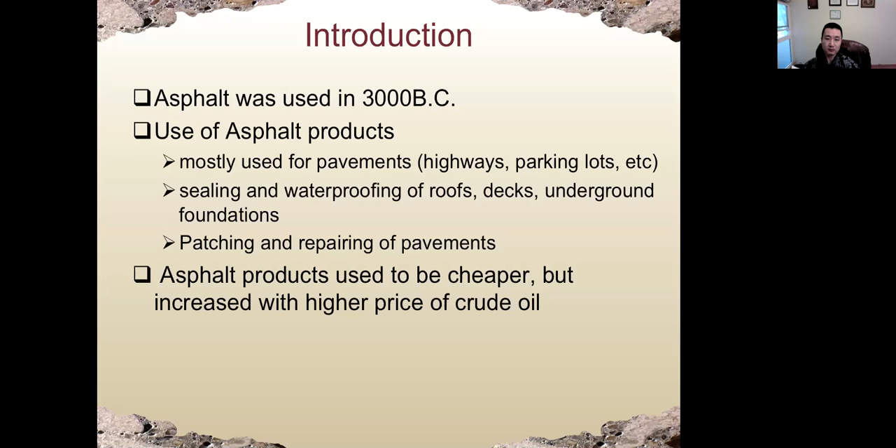Crude oil, everybody knows, is a form of fossil fuel. The other types of fossil fuel are coal and natural gas. Crude oil is a mixture of many different types of fossil fuel, including gasoline, which we put in cars, diesel oil, fuel oils, kerosene, jet fuels, and also asphalt. Crude oil, depending on the source and location, may change in color and thickness and in the percentage of different types of oil inside.

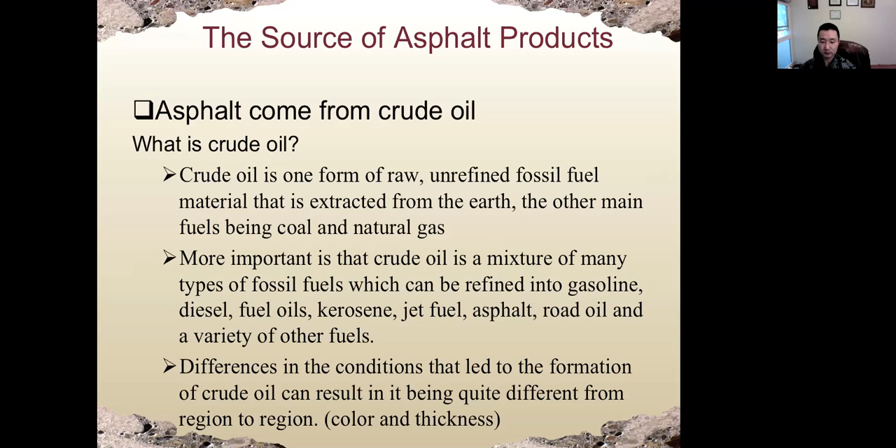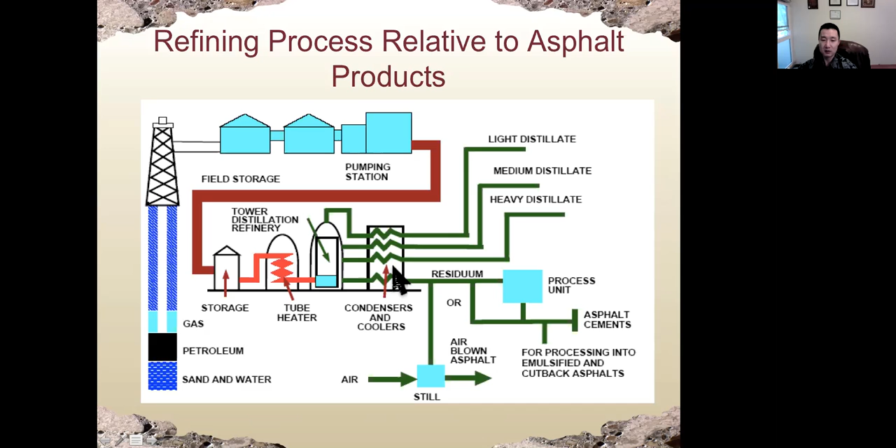Inside residue we have asphalt cement, or we have emulsifying agent, and also distillate, which we also use in some types of asphalt cement. We're gonna discuss that in a moment. So the refining process includes separating different types of materials based on different temperatures.

Again, the first step is we remove the sand and water from the crude oil, put in the settling tank. And most crude oil is somewhat acidic, so the pH level is less than 7.

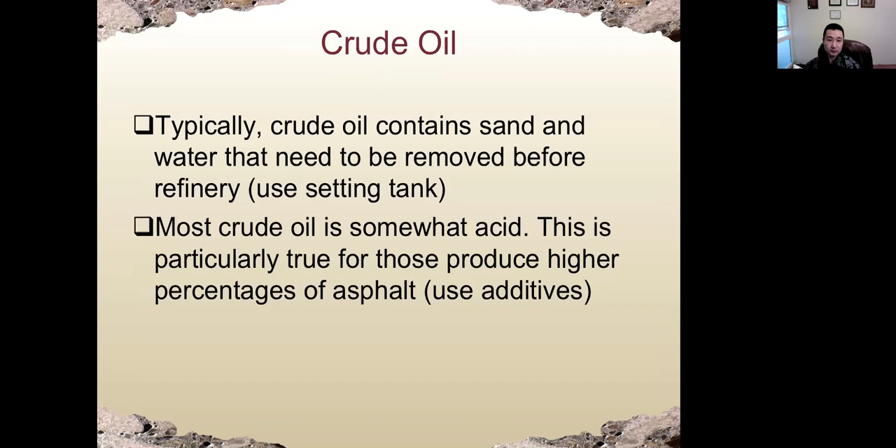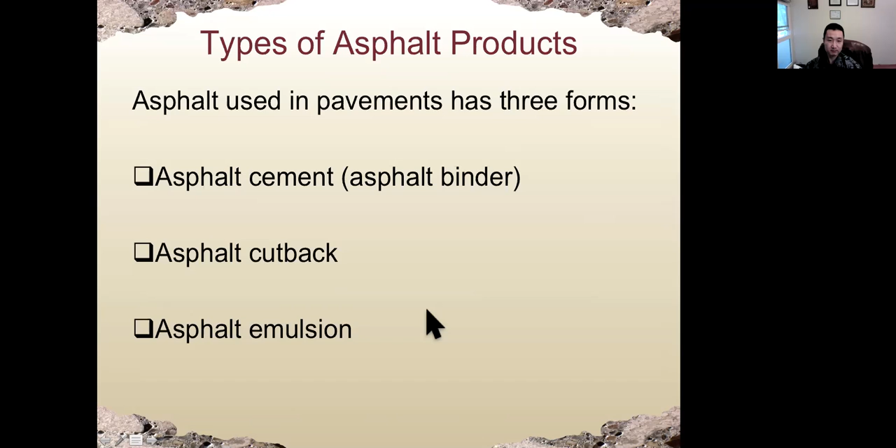Then let's look at asphalt products. Asphalt used in pavement has basically 3 different forms, depending on how we liquefy them. So they are asphalt cement, also called asphalt binder, asphalt cutback, and asphalt emulsion. We have these three types of asphalt because the ways we liquefy them are different.

But first of all, why do we need to liquefy asphalt? At room temperature, the asphalt is semi-solid. But for asphalt concrete, we need to mix the asphalt with sand and coarse aggregate. This is the same as Portland cement concrete. For Portland cement concrete, we mix cement powder with water, so we have cement paste. Then we mix the cement paste with sand and coarse aggregate, so we have Portland cement concrete.

For asphalt concrete, the asphalt will be the binder, same role as Portland cement paste. But at room temperature, asphalt is semi-solid. How can we mix it with sand and coarse aggregate? So we need to liquefy it. How do we liquefy asphalt? We have three different methods, so we have three different asphalt products.

For asphalt cement, the liquefying method is heating - we increase the temperature of asphalt cement to liquefy it. Or we can dissolve it into a so-called petroleum solvent, in which case we call that asphalt cutback. Or we can emulsify it with water, in which case we call that asphalt emulsion. And asphalt cement is by far the most commonly used asphalt product.

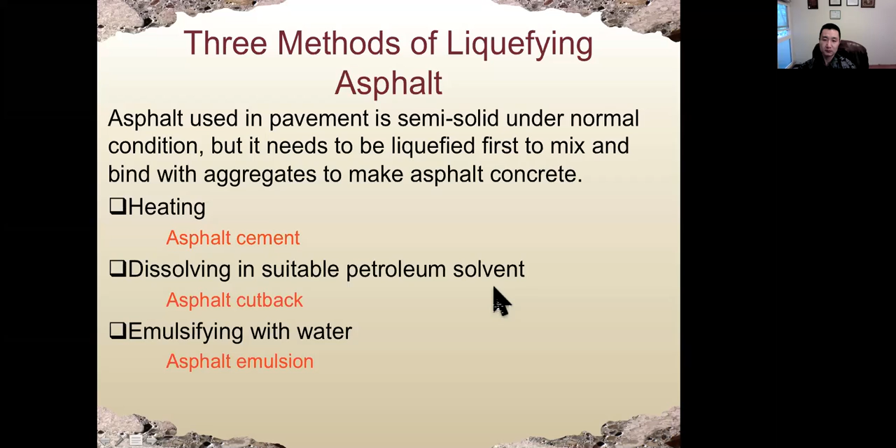Let's look at asphalt cement first. It is the first type and the most commonly used one. It is a residual from crude oil distillation. The consistency, which is how easily the asphalt cement can flow, depends on the source of the crude oil, the refining process, and also the amount of lighter fraction removed. It is semi-solid under room temperature.

To make it liquefy, it needs to be heated up. So when we heat up the asphalt cement, the viscosity will be lower, so we can mix it with sand and coarse aggregate. So that's the first type, asphalt cement.

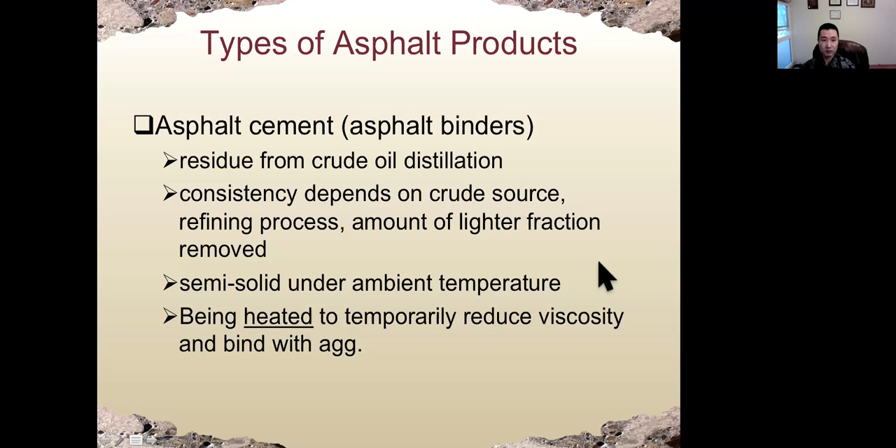The second one is asphalt cutback. It is produced by dissolving asphalt cement in a lighter molecular weight hydrocarbon solvent. The hydrocarbon solvent also comes from crude oil, so the properties depend on the types and amount of the solvent. The curing rate, which is how soon the asphalt cement hardens, depends on the type of solvent we use, and the viscosity is a function of how much solvent we add - we need the solvent to liquefy the asphalt cement.

The solvent will eventually evaporate into the air, so the asphalt cement will harden. Because the asphalt cement comes from crude oil, it used to be cheaper, but the price depends on the price of crude oil. Another drawback of asphalt cutback is that it is not very environmentally friendly, because the solvent will evaporate into the air, which may pollute the air and cause pollution problems.

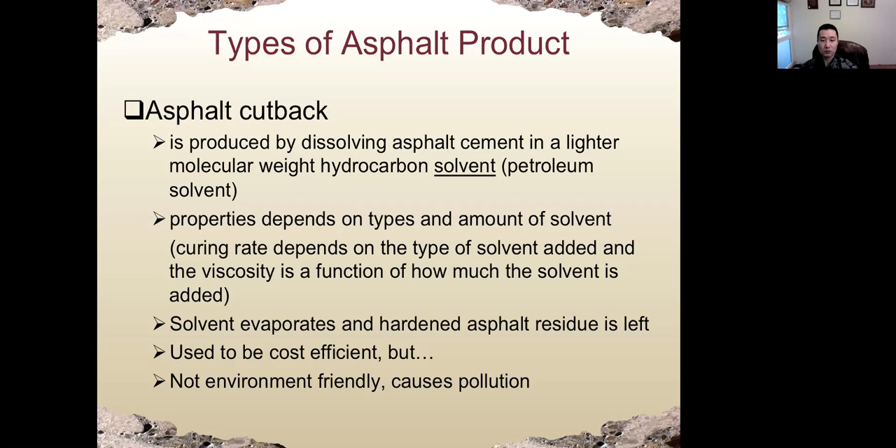The third type is asphalt emulsion. Asphalt cement for asphalt emulsion is physically broken down into smaller size globules, which are mixed with water. The water has a small percentage of so-called emulsifier agent - the percentage of emulsifier agent is very small, only about 1% of the total. So for asphalt emulsion, we have 60 to 70% asphalt residue, about 30 to 40% water, and 1% emulsifier agent.

Emulsifier agent is similar to chemical admixtures, such as superplasticizer we use in Portland cement concrete. Let's look at the molecule - the molecule of emulsifier agent has two different sides, two different components: a head with electronic charge, and also a tail which has high affinity for asphalt.

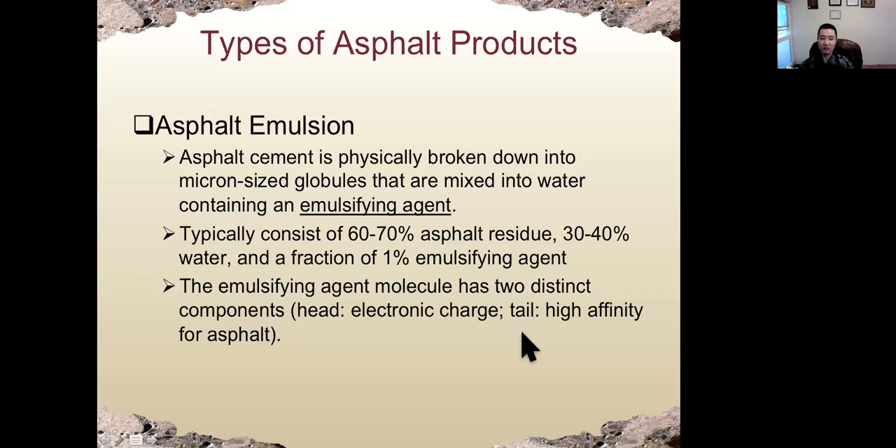This is similar to the molecule structure of superplasticizer, and the function of the molecule for emulsifier agent and superplasticizer is also kind of similar. As we can see, the head is hydrophilic, which means it likes water, and the tail is hydrophobic, which means it hates water. So the tail will attach to the particle of asphalt, so the surface of the asphalt particle will all be negative charge, so they will repel each other - that's how we can emulsify the asphalt emulsion. Again, very similar to how superplasticizer works.

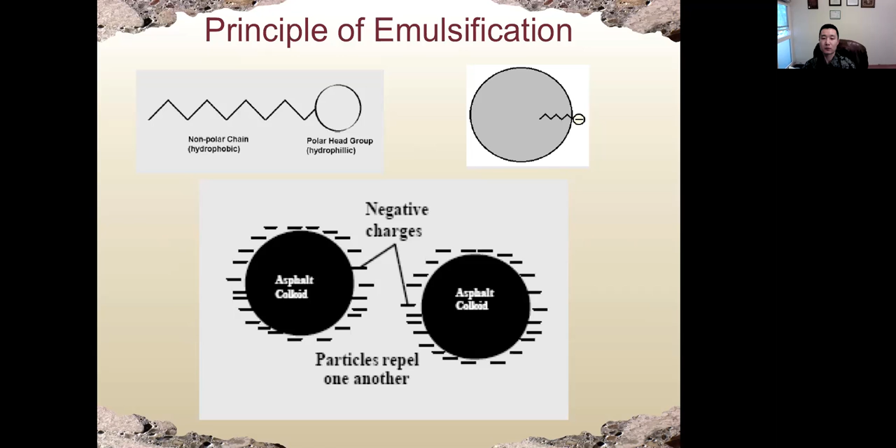So for asphalt emulsion, the setting, which is how soon the asphalt will harden, is a phenomenon of separation between the asphalt residue and the water. In the water we have a small percentage of emulsifier agent, and the rate of setting is controlled by the type and amount of this emulsifier agent.

It is more cost effective because mostly we have water and only a small percentage is emulsifier agent. It's also more environmental friendly because not a lot of solvent is used, as it is in the second type of asphalt.

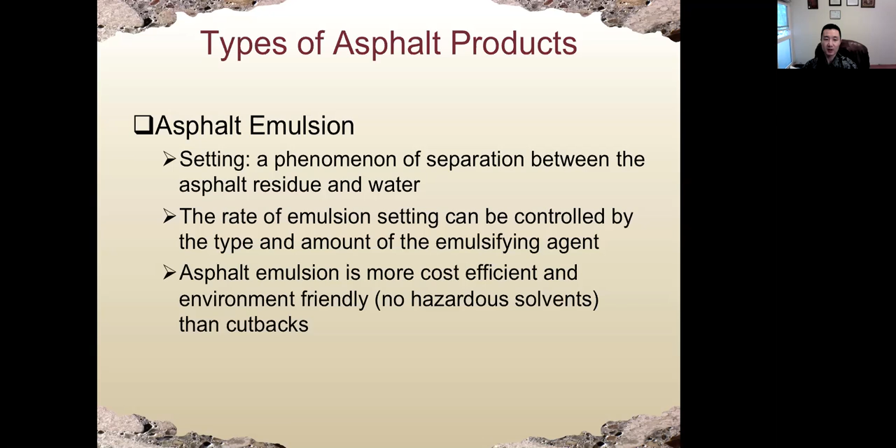Before we talk about the testing method for asphalt, let's talk about the special property of asphalt. Asphalt is a very temperature sensitive material. This is different from Portland cement concrete, which is not very sensitive to temperature.

Increasing or reducing temperature by 20 or 30 degrees will not change the hardening property of concrete quite a lot. But for asphalt, it is very sensitive to temperature. Increase the temperature 10 degrees, the viscosity will be reduced quite a lot, meaning it becomes softer. Reduce the temperature, the viscosity will be higher, it becomes hard and more brittle.

So for a certain type of asphalt, we have a so-called optimal range for viscosity. Because viscosity depends on temperature, for a certain type of asphalt we have the optimal range for temperature. At the end of this class, we'll try to select which type of asphalt for a certain location, because in certain locations the temperature range will be different.

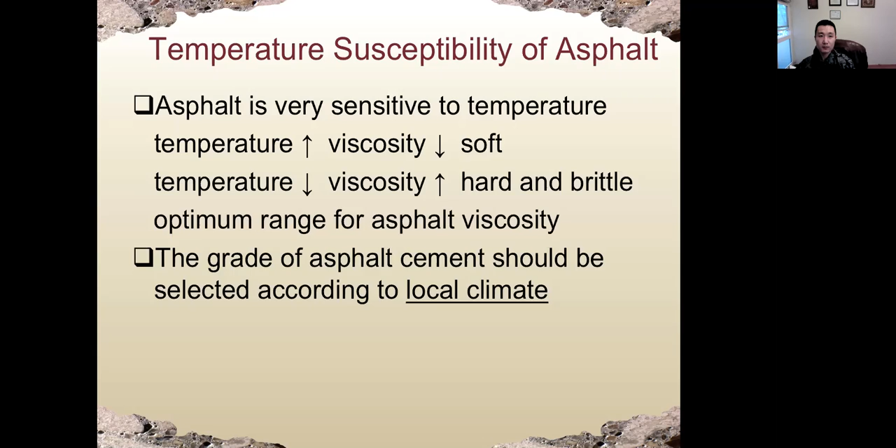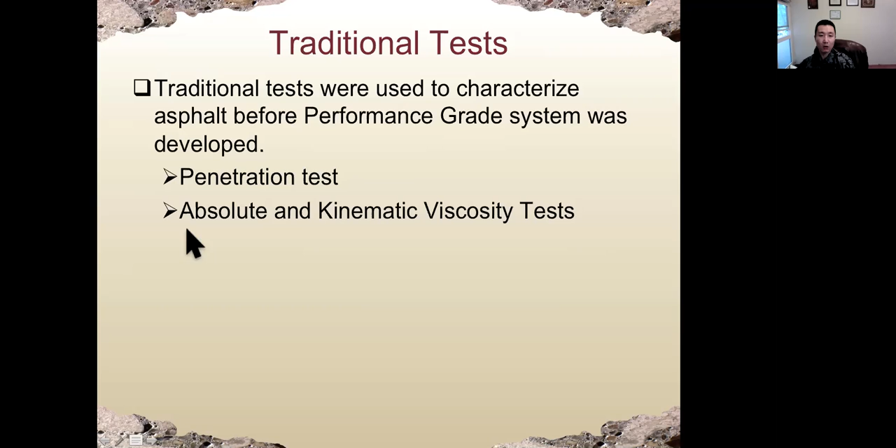Traditional test methods for asphalt include the penetration test, or we can measure the viscosity of asphalt cement. For example, this is the penetration test, where we measure the consistency of asphalt cement.

The test is controlled at 25 degrees Celsius, again because asphalt cement is very temperature sensitive. We use a needle with a certain weight, and the needle will penetrate the asphalt cement for 5 seconds. Depending on the penetration depth, we can judge the consistency of the asphalt. A larger penetration value indicates a softer material.

So this is a very simple test. We measure the consistency of asphalt cement, but this test does not give us an idea of the actual performance of asphalt, so we do not know how the asphalt will perform in a certain pavement.

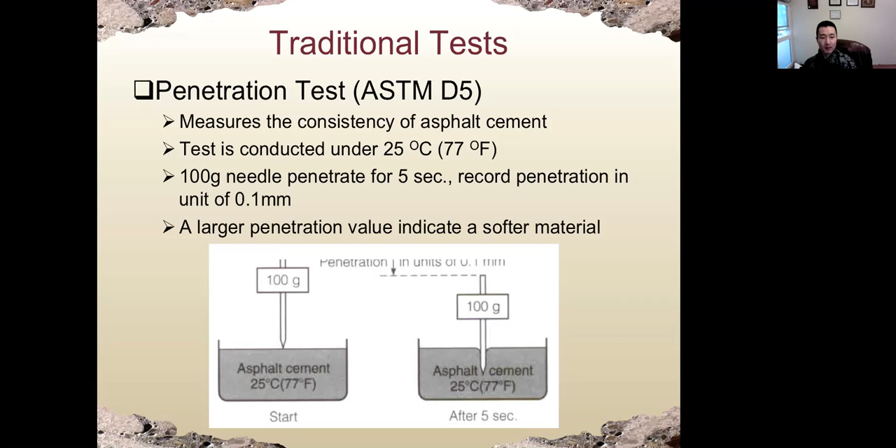That's the reason we later have a so-called performance grade test. The performance grade system was developed by the Federal Highway Administration. Inside the Federal Highway Administration, we have the Strategic Highway Research Program, or SHRP. It was developed around 30 years ago.

Compared to traditional tests such as the penetration test, the performance grade specification was designed to provide performance related properties of pavement.

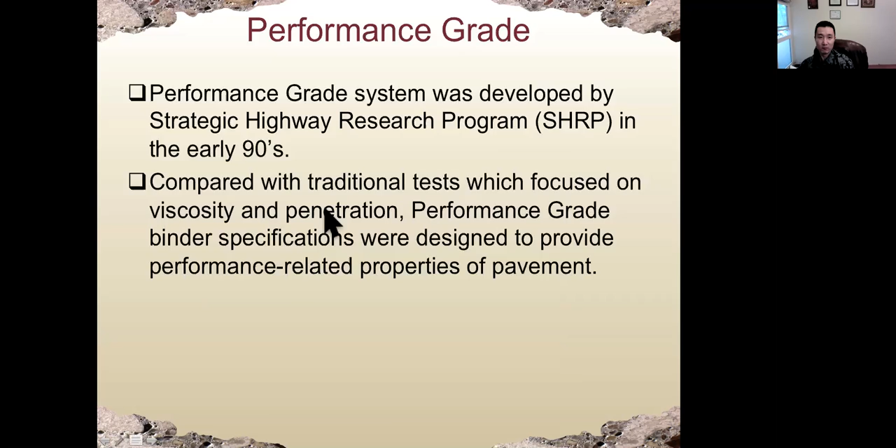For example, for this test, the name is called the rolling thin film oven test. This is one of the ASTM standard tests. This test simulates the short-term aging process of asphalt during the production period. In the production period, we heat up the asphalt and mix asphalt binder with sand and coarse aggregate, and then we pave the road. We do that on the first day of construction, and this rolling thin film oven test simulates that first day, the short-term aging process.

Why do we care about the first day? Because during the production period, we increase the temperature of the asphalt binder, and during that process we have a lot of heat due to the high temperature.

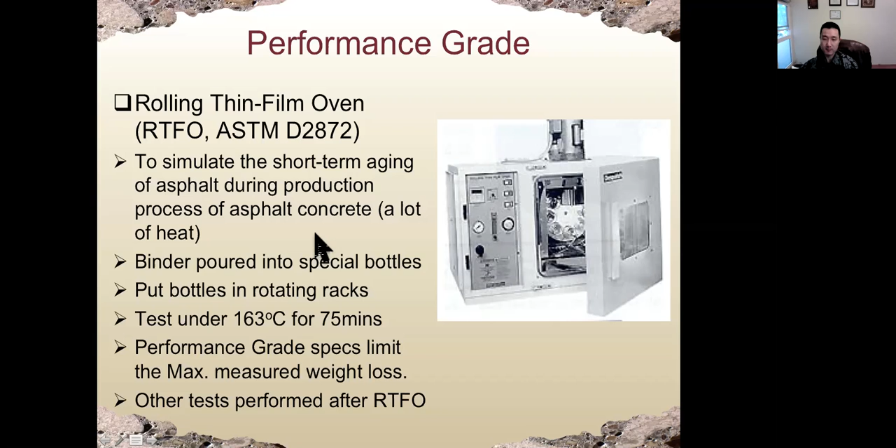The next test is called pressure aging vessel. It's also an ASTM standard test. The purpose is to simulate the aging process of asphalt over its service life, 10 years or 20 years. This is a slowing aging process.

The asphalt binder is first aged in the rolling thin film oven, the first test we just talked about. Then we force oxygen into the sample. The oxygen will age the asphalt binder over time, but it takes 10 or 20 years. How can we accelerate that process?

We use a vacuum oven to remove the air bubbles before the test, and then we age at a certain temperature, about 100 degrees Celsius, depending on the grade of asphalt. We also apply high pressure because we want to accelerate the aging process. So for 20 hours, we can simulate the aging process for 10 or 20 years of asphalt. After that, we can do some other tests such as shear, creep, and other mechanical property tests.

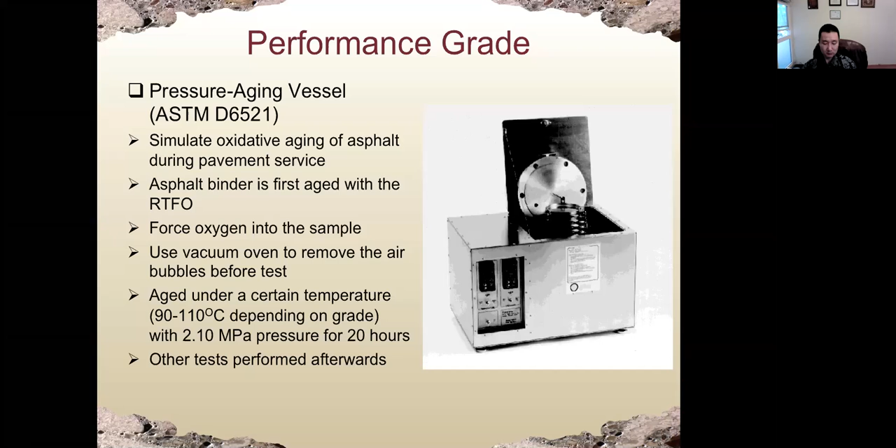This is another test called flash point. Because we do not want asphalt pavement to burn after a car accident, we want to know what is the flash point for asphalt.

For this test, it's pretty simple. We just increase the temperature of asphalt, and after several seconds, we pass a small flame on the top surface of the asphalt, and we see what is the flash point for the asphalt cement. So this is a safety test to measure the flash point of the asphalt cement.

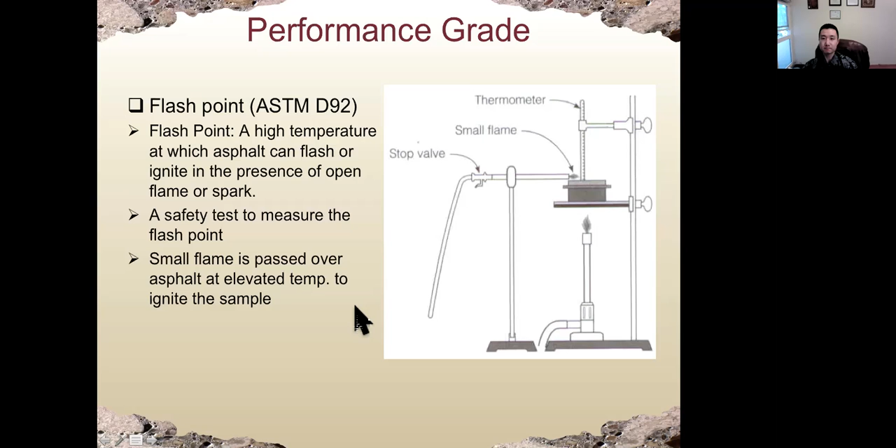This is viscosity measurement. We measure the viscosity of asphalt binder. This is called the rotational viscometer test. In this test, we have the coaxial cylinder setup. Coaxial cylinder means we have a rotational spindle which is inside a chamber. The chamber is also cylinder shaped.

In the sample, we have asphalt cement in there. So the asphalt binder is sheared between the cylinder, spindle, and the chamber. The temperature is well controlled at 135 degrees Celsius, and we can calculate the viscosity of asphalt based on the torque and also speed of the spindle. This is a very commonly used viscometer. We can use this for asphalt, and also we have used it for Portland cement paste.

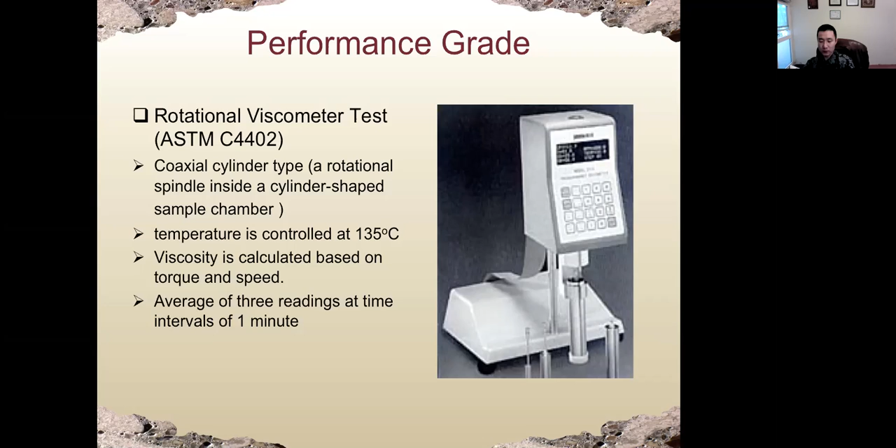For other performance grade tests, including shear, bending, or tension tests, this is for mechanical property of asphalt. All of them are ASTM or AASHTO standard tests. We'll just skip the details of these tests.

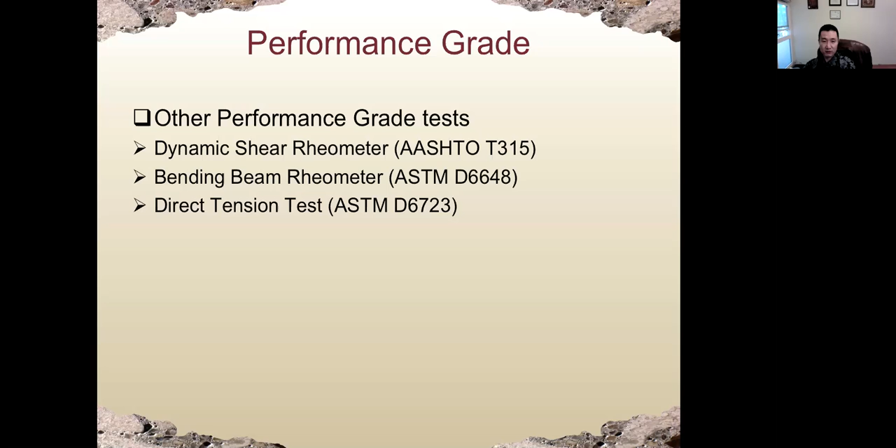So the last part of today's lecture, we talk about how we can select the asphalt based on local climate. Asphalt binder can be classified based on performance grading. This is a new type of grading which we'll focus on in this class.

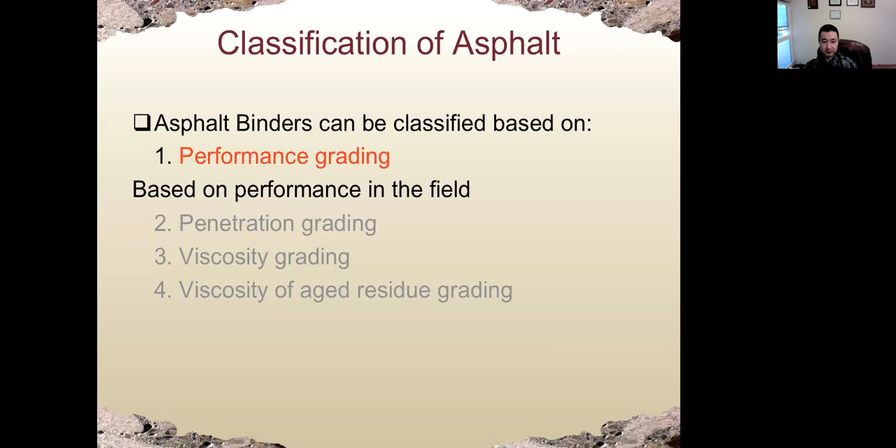For a certain grade, we have high temperature grades, for example 46 degree, 64 degree, or 82 degree, depending on where you want to put your asphalt. In warm, tropical weather, we're going to increase the design temperature. In Alaska, you're going to reduce your low temperature grade. For every grade of high temperature, we have several different low temperature grades. For example, for PG70, we have -10, -16, to -40 to choose from.

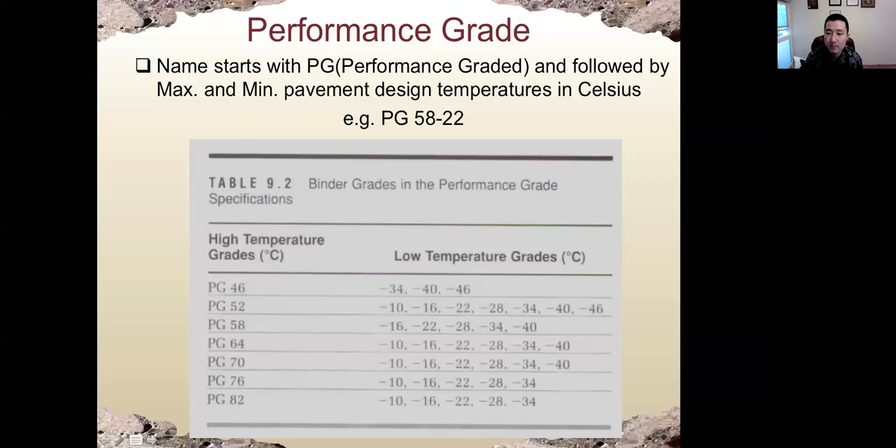So let's look at how we can select the performance grade of the asphalt depending on the local climate. To satisfy the maximum and minimum design pavement temperature, we need the local history of temperature. The maximum temperature of the pavement will be the highest average 7-day temperature, but for the minimum temperature of the pavement, it will be the lowest 1-day temperature recorded.

We also need to consider the reliability level, which is the percent probability in a single year that the actual pavement temperature will not be out of the range of maximum and minimum temperature. It is also assumed that the design high and design low pavement temperature will follow a normal distribution. From CE375, we learn different types of distribution, and one of them is called normal distribution. We assume the temperature will follow normal distributions.

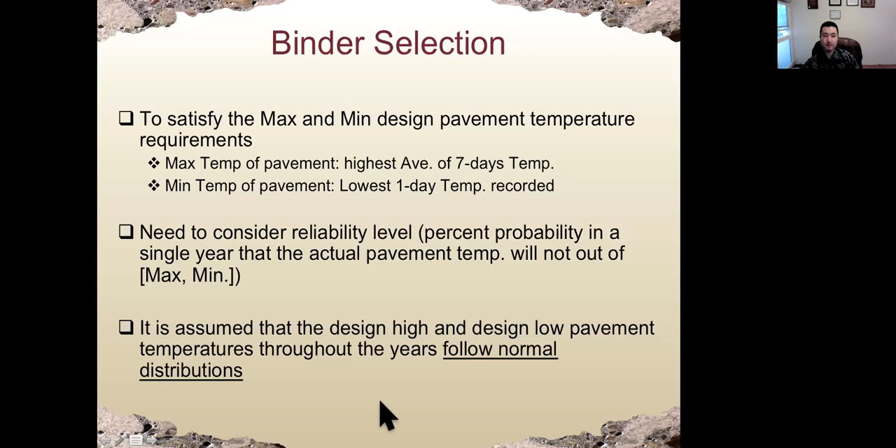Let's look at an example here. The question tells us the average 7-day max pavement temperature is 56 degrees, and the standard deviation is 2 degrees Celsius. We're going to use the standard deviation and the 56 degrees Celsius to calculate our design temperature. For the average minimum temperature it is -23 degrees Celsius, with the standard deviation of 4 degrees Celsius. So the question asks what standard PG grade the binder should be selected with a reliability level of 98%.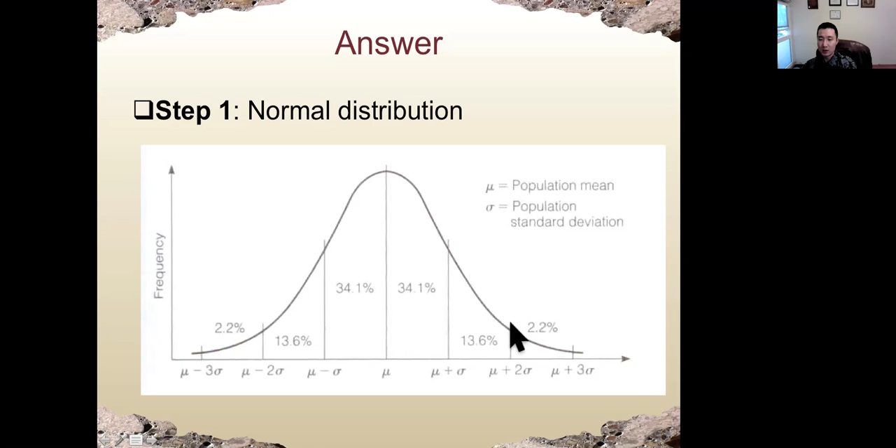For low temperature, it will be opposite. So the low temperature needs to be lower than the low 1-day temperature, which is minus 23 degrees Celsius. It will be minus 4 degrees standard deviation, times 2, so that is minus 31 degrees Celsius.

Okay, so why do we do that? Let me write something for you to help us better understand why we use plus for the high temperature and minus for the low temperature.

So the question tells us the minimum and the maximum temperature. The minimum temperature is minus 23 degrees Celsius, standard deviation is 4 degrees. The high temperature is 56 degrees with a standard deviation of 2. So this is the local temperature we get.

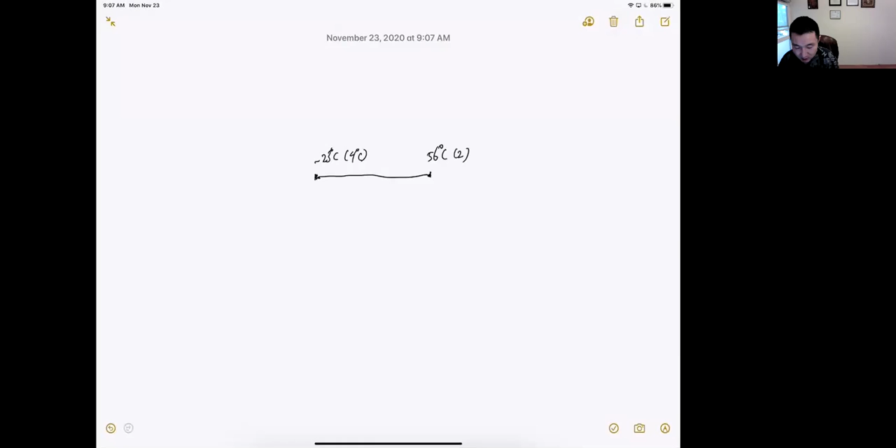So for 98% reliability level, we want the high temperature to increase 2 times 2 degrees, so that is 60 degrees. So we want to increase the range further to 60 degrees Celsius, so we increase the range.

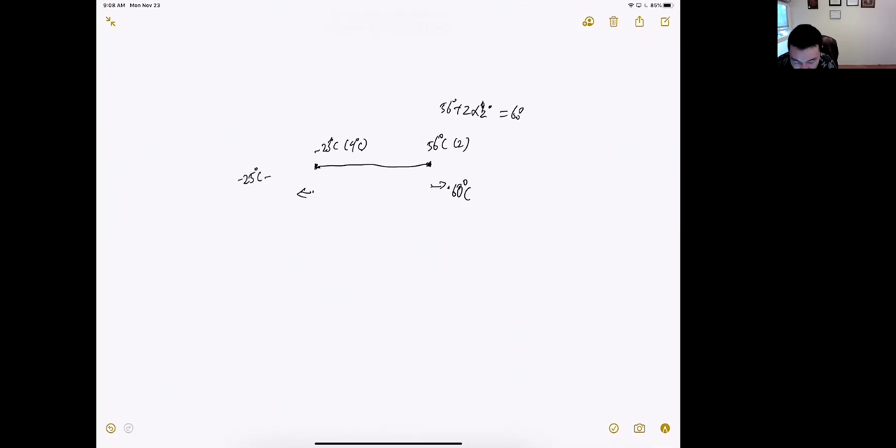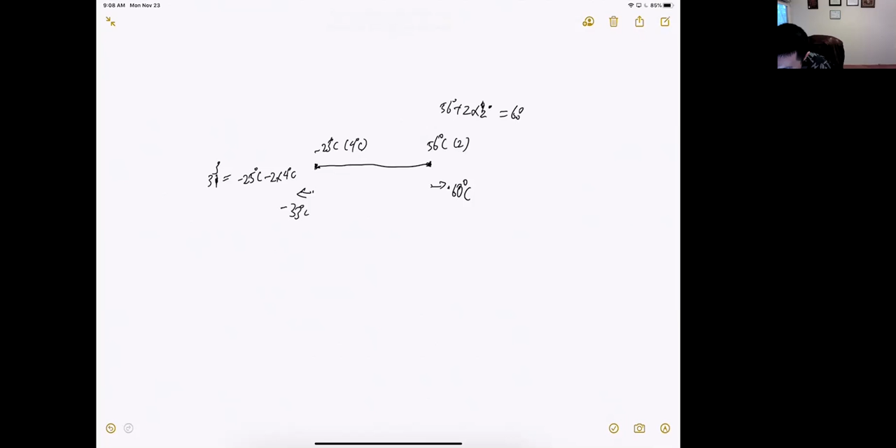For the low temperature, we also want to increase the range by reducing the low temperature, to minus 25 degrees. Again we minus 2 times 4 degrees Celsius, so that is equal to... oh, that should be 33 degrees, sorry. 25 plus 2 times 4 degrees, so that's 8, so that should be minus 33 degrees Celsius. So we increase the range from minus 25 to minus 33, and 56 to 60 degrees Celsius.

Because we have 98% reliability requirement, the grade will be 60 and minus 33. And then we should look at a table, but in the table we do not have such a degree, so we should choose the closest PG grade from asphalt binder.

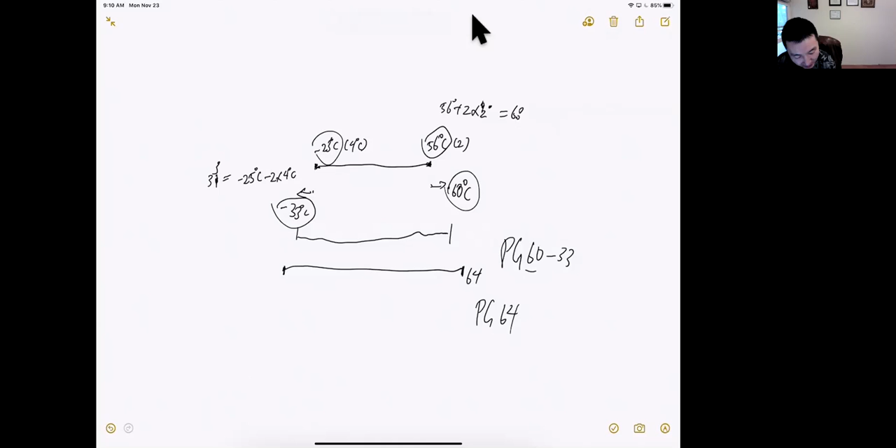So the only PG we have closest to 60 degrees is 64, and that temperature should be higher than 60. And the lowest temperature closest to minus 33 is minus 34. So this is the performance grade available for us to choose.

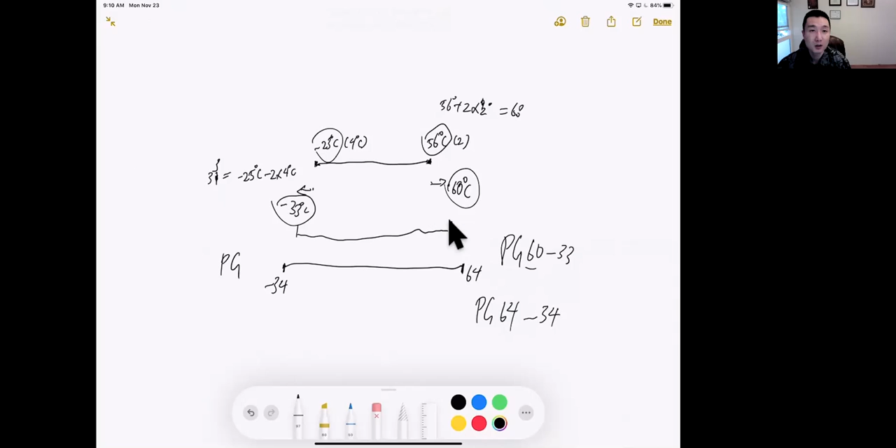So we further increase the range to 64 minus 34. So that is how we choose the PG grade.

So step 3 is we choose the grade, because we get the high temperature should be 60, low temperature should be... it's not 25, sorry, it's 33, minus 33 degree, that's correct. So we need to further increase the range. The range is 60 minus 31... the closest standard PG asphalt binder grade that satisfies our two temperature requirements is PG 64 minus 34.

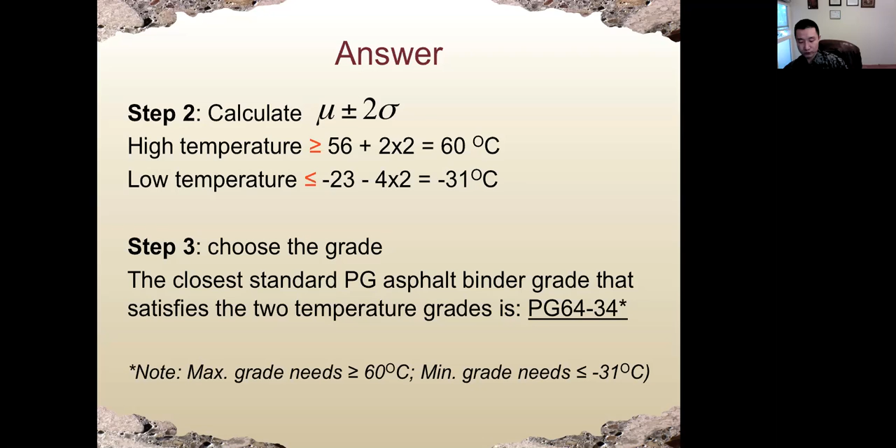Again, remember for high temperature, it should be larger than high temperature plus 2 sigma. For low temperature, it will be smaller than low temperature minus 2 sigma. And then the grade will be further widened to cover that high and low temperature range. That is how we select the PG grade for asphalt binder. Again, we choose from the table the closest one to cover the high and low temperature, so 64 minus 34 is the one to choose.

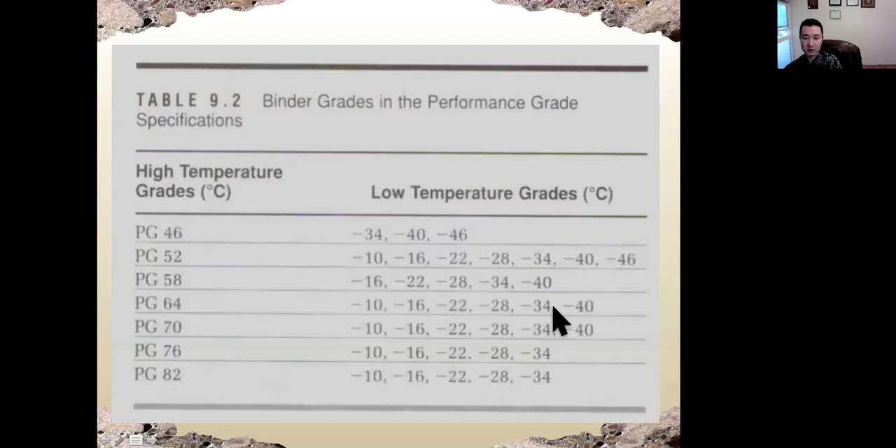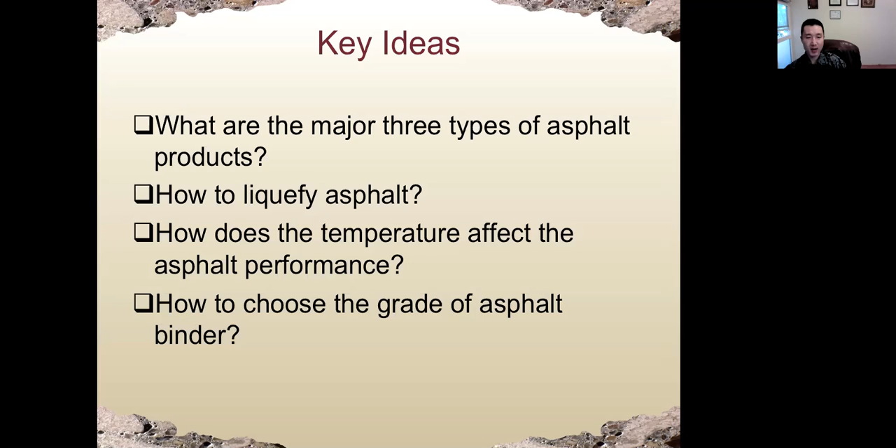All right, so that's the end for today's lecture. We talked about 3 types of asphalt product depending on how we liquefy the asphalt cement, and how temperature affects the performance: increased temperature, the viscosity will be lower, and vice versa. Most importantly, how we choose the grade of asphalt binder. Please go back to review the sample question we just discussed. That's the end.